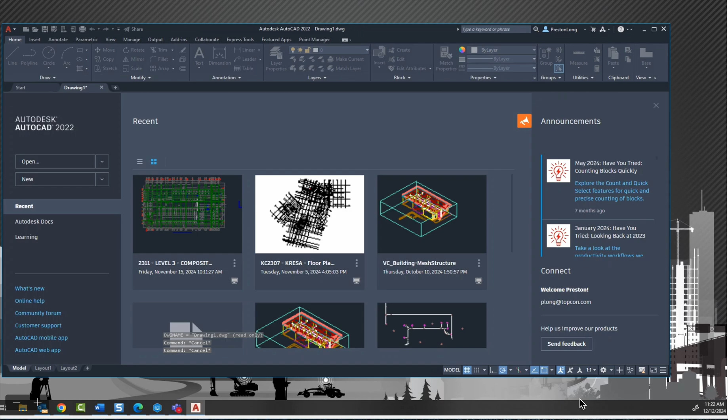I don't know if you guys saw as it was opening up, AutoCAD open. This wasn't there, and then once it initialized, our point manager ribbon popped up as well.

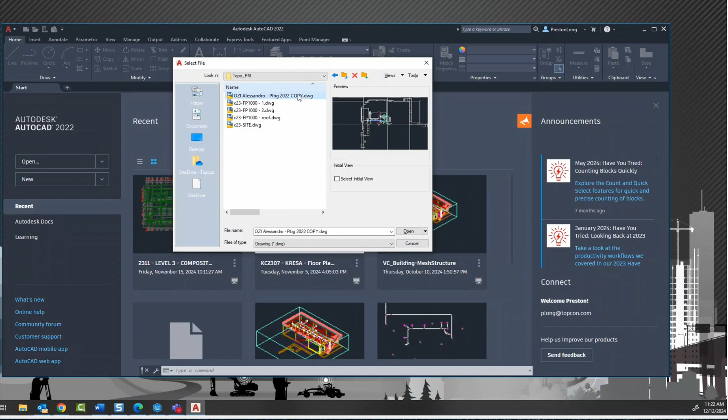Okay, so let's go ahead and, which one is our primary here? The primary is going to be the Alessandro. This one, perfect. Yeah, all right.

It made me re-add them, didn't it? Does this have most of the content you want to use? Yeah, this I already, if you look, there's already some points in there that I was putting down, but this should have everything that we would use.

So one thing we need to keep in mind when we're prepping the files for the data collector, if you're running a DWG that has a bunch of XREFs in it and you want any of that XREF stuff to show up on the data collector as a background, you're going to need to make sure that's all in the same drawing.

So you might have to bind, sometimes we call it a working background, and bind everything that we need just so we can use that as a background for the guys in the field.

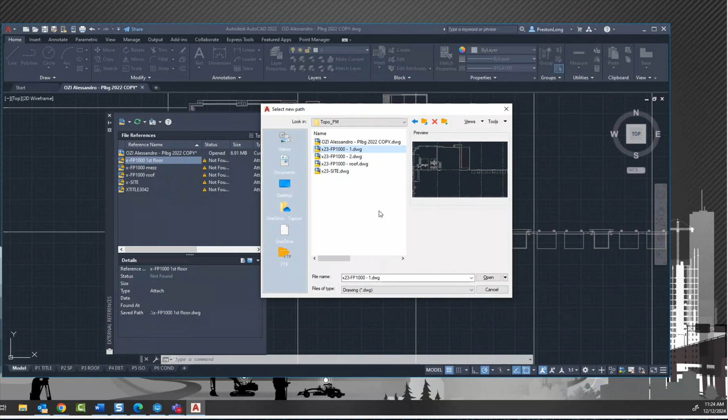Real quick, I just wanted to point out, obviously the naming conventions are different, so should I just go ahead and remove these and add these in as new? They might not even need them at this. I thought they were the ones, but I didn't really look to see if they were actually the ones. But if everything's popping up in the background, then you probably don't even need them.

We'll just see if they're, we'll just add them in, and we can always unload them if we don't think we need them.

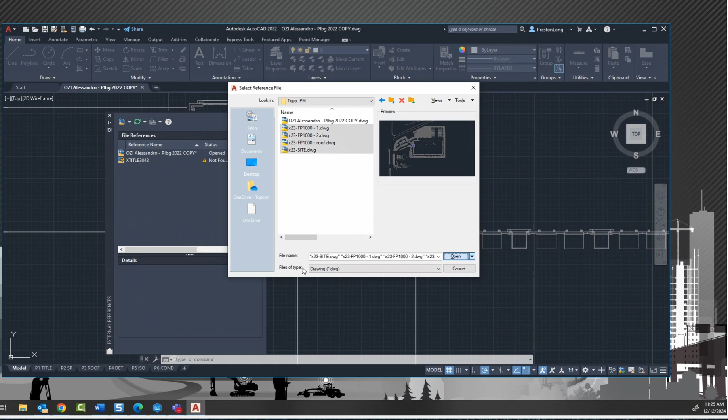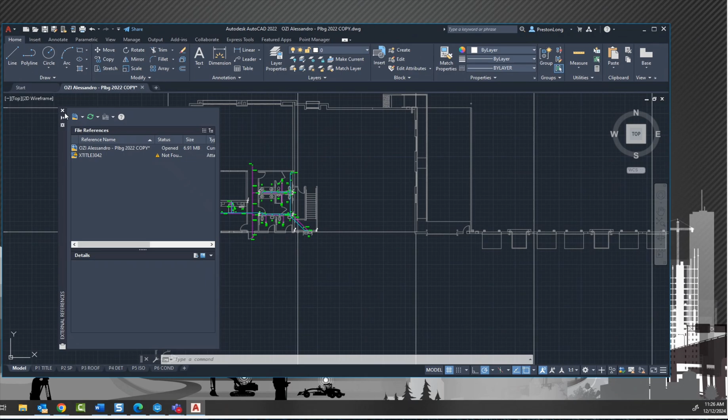I don't think, oh, it's because I had already bound them to the drawing. So yeah, I had figured that out, that I needed to bind the background on it in order for it to show up after exporting it. So it's already bound on there, I believe.

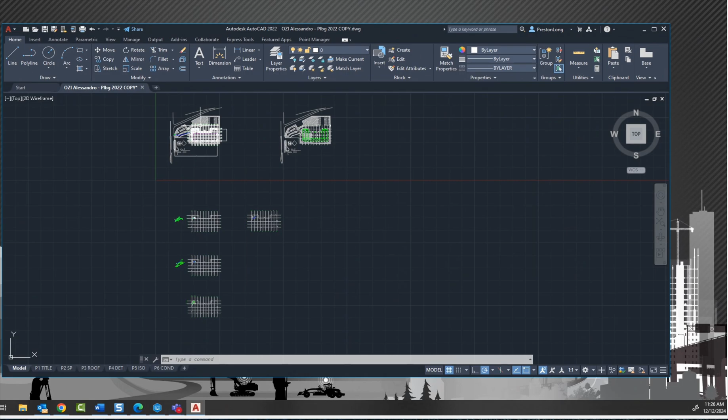The export points in background will let you, like, you can have a file like this with a bunch of stuff everywhere, but when you create the background, you can just window off a section of it so it doesn't take everything else with it. That makes sense? Yeah, yeah.

I think I was using just one section. I tried exporting a few of them, and I would just window out one section of the whole model.

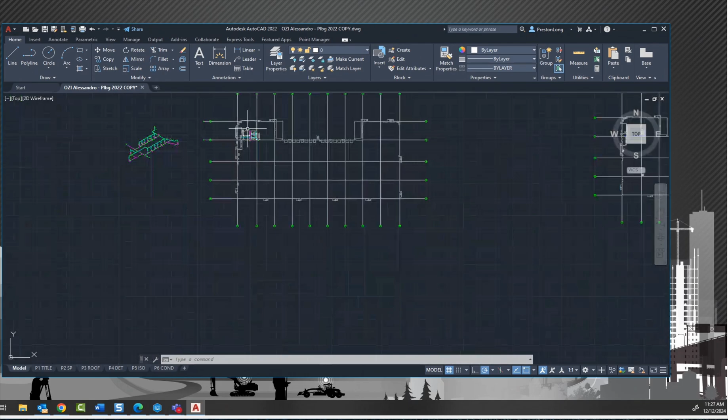Good, so is that the area you're looking at? Here, yeah, right in there. You can see some points in there already. Oh, right here. Yep. Perfect.

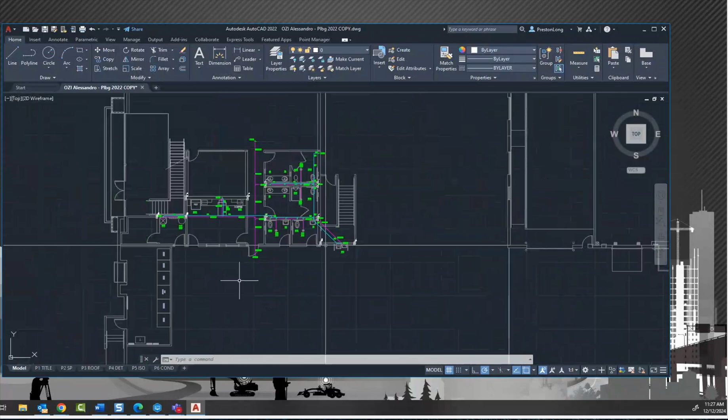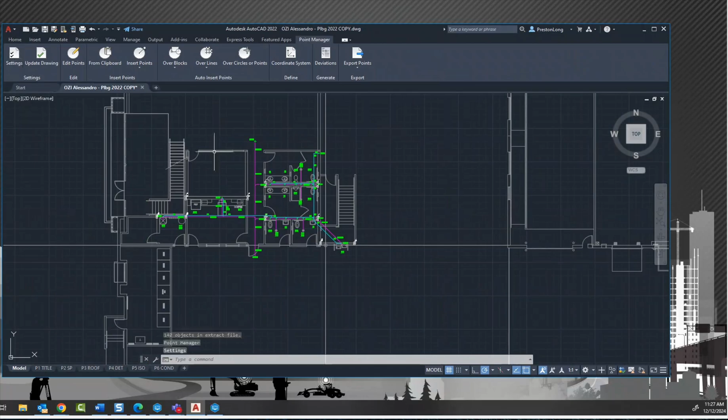All right, so obviously our point manager, our tab up here at the top, the first thing we want to look at is our settings as well. Once you change these settings, you shouldn't have to keep going back in here unless you see something wild going on, they should stay static. Obviously, mine is set to inches, and that should be pretty consistent for most AutoCAD models.

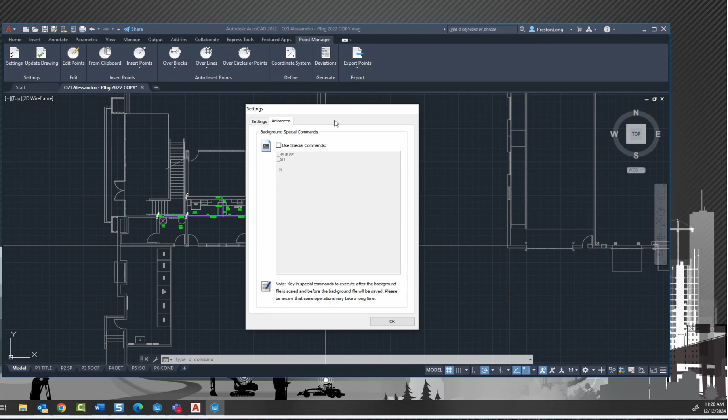Obviously you're going to have some that don't meet the proper scales, coming over from something else, civil and so forth. Sometimes that stuff can get a little finicky. When you look at layout and some of the things as you move forward, whenever there's a discrepancy in scale, I'd say 9 out of 10 times it's units. We're not in the right units somewhere, whether it's in the model or when we're bringing it into the tablet. Just try to check and make sure you stay consistent.

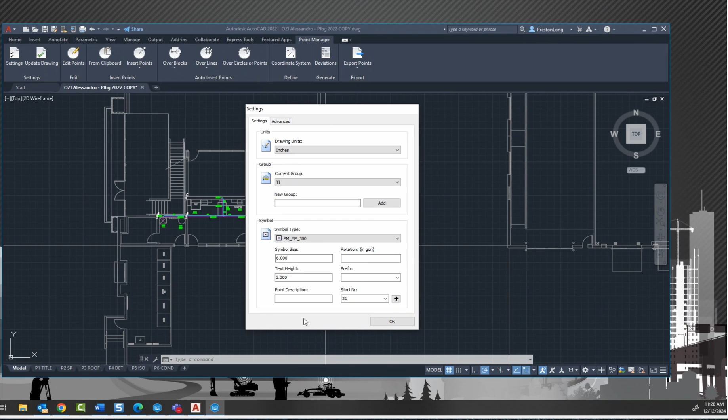Here's our symbol size. This is what we're talking about, making sure it's relative to whatever units you're using, and you don't have anything where your numbers are massive. Things look pretty good there, consistent with what your annotation is on the model now. So we'll see how that goes moving forward. That settings area is where you could tone down the size of the block used for your point. Some people like a smaller block, some people like it bigger - it's all up to you, and that's where you change the size. Just kind of depends on the surrounding stuff.

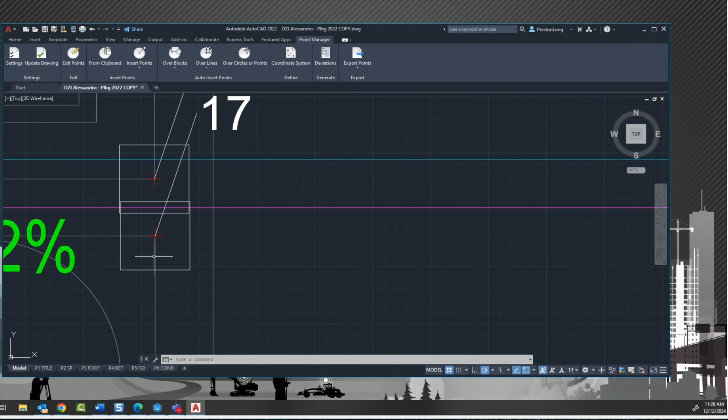Okay, so this whole background is block. I just think it exploded once.

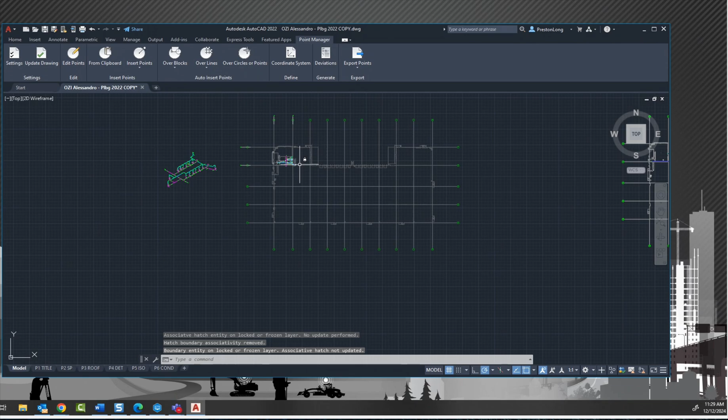All right. Yep. All right, cool.

All right, so you do have existing points in there. Ultimately, that is what this edit points is. If you're wanting to look at what you have in there, we can click on that.

And the wizard keeps coming up on the main screen. Go next. Whatever groups you do have will be listed here. You can go look at it, edit it, or you can just straight delete the group. I'm going to go ahead, just for the sake of it, let's look at what we have in here, and then we can go back and delete or whatever it is.

So let's look at editing this group, and more or less I just want to see kind of what all we have there. Again, you can do this per group if you need symbols to be bigger or smaller based off of the group. You can also make that adjustment per group. These settings are specific to the groups themselves, so just a little bit of control as far as what the annotation looks like.

If we go back one - yeah, so you see the bottom left where it says code/description. You can type whatever you want in there, and that's what's going to show up on the data collector when those guys are laying this stuff out. So if it was sleeves you wanted to put in there, or hangers, or 4-inch waste and vent, whatever you guys wanted to put in there, that's what would go in there, and then that travels with that point to the data collector. So a lot of people use that for giving a little bit more information to the guys in the field. That makes sense, yeah.

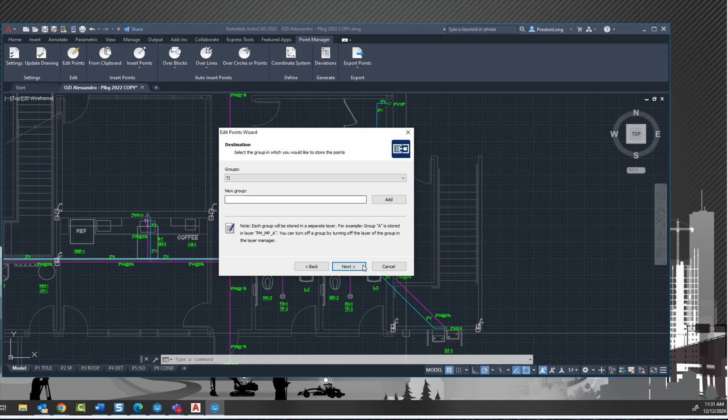If you want to create a new group, obviously you can move these points to that group - we don't need to do that here. And then this kind of gives us the list here of what we have. Looks like you have 20 points. And if you needed to do anything here, it's really just checking it - you're not able to modify anything. This is more just a visual check to see what you have on that group.

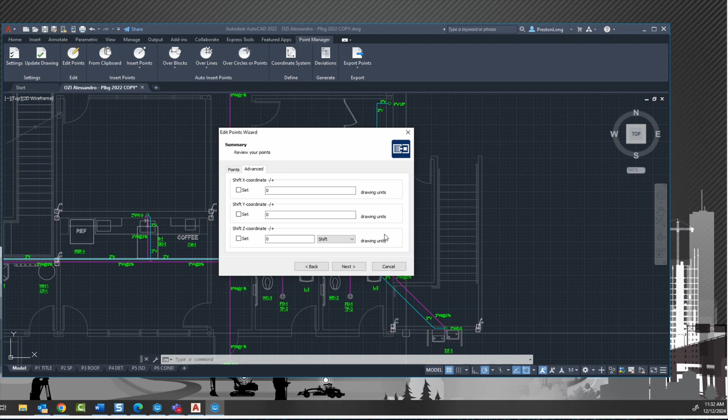And then obviously here you can do some shifting. If you want to do any offsetting, that would be in the advanced tab. So if we go next, there's not a whole lot more you can do - we were just checking to see what we had in that group.

Okay, so just kind of moving along here, we have our clipboard.

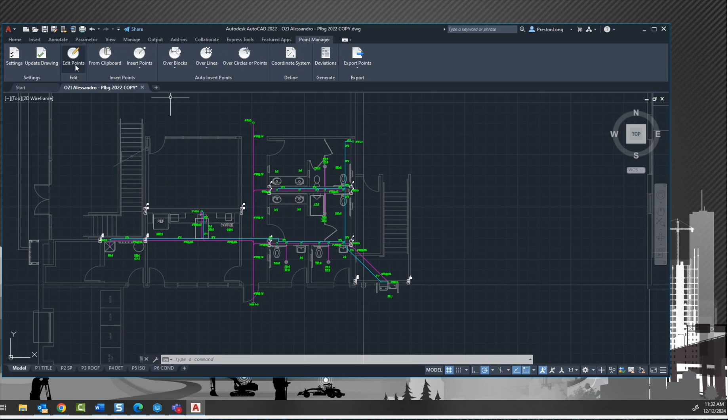If you had points in the application itself - let's say we had points, we brought a CSV file into here, and we needed to get those into AutoCAD. Whenever we get points in CAD, it won't auto put them in here. We actually have to do it from clipboard, because what it does is it kind of puts it out there temporarily. That way, if you open up the model and need to look at something or make changes prior to those points coming in, they're not just thrown in there automatically when the drawing opens up. It allows you to - and if they don't populate immediately, that's what this update drawing's for. It kind of refreshes the cache to make sure everything's visibly there.

And then from here, obviously I don't know how much we'll be able to do with these, but ultimately this is kind of your general place points. You have within quadrants - what that means is you can insert points, but then dictate where you want that annotation to be placed. If you follow the insert points, it'll follow the position within the group text where we were just editing the points. I don't know if you saw one of those screens that actually has annotation position - if we just use that first one, it's going to use the default set for that group. And then you can still move them manually if you needed to. So that's your manual placing of points.

Over blocks, this is exactly what it is. If you need to, if you have blocks and want to do multiple at a time, you can actually select the blocks.

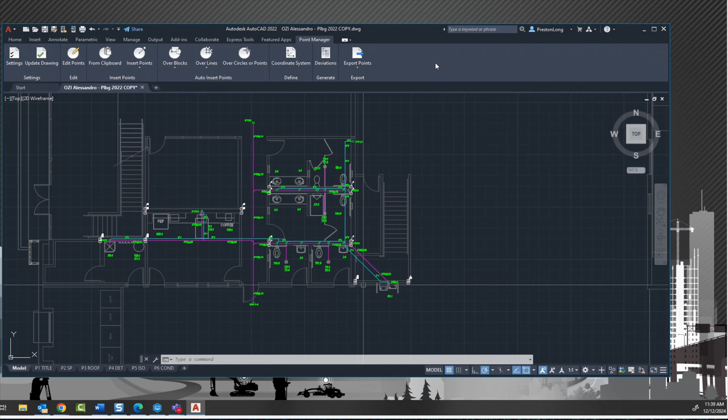Okay, any questions so far? No, pretty straightforward. Yeah, okay.